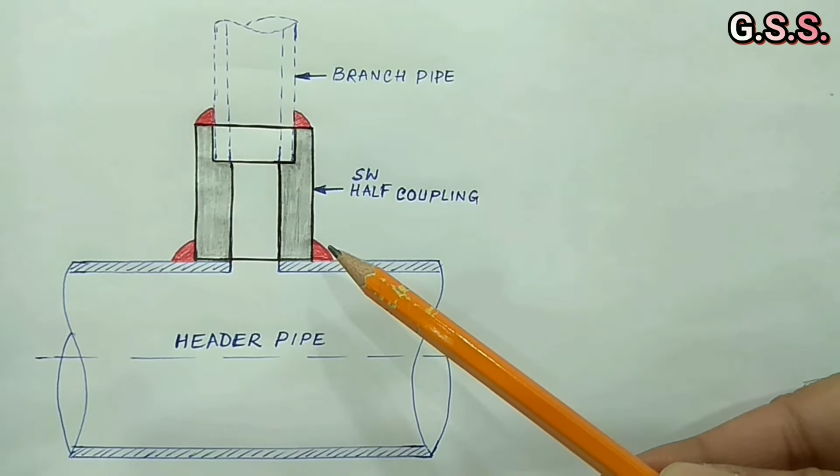Half coupling is used for taking small dia branching from large dia header pipe, and half coupling is directly fillet welded to the header pipe. Half coupling can be of socket weld end type or can be of screwed end type, and half coupling dimensions are as per ASME B16.11 3000 pound, 6000 pound or 9000 pound.

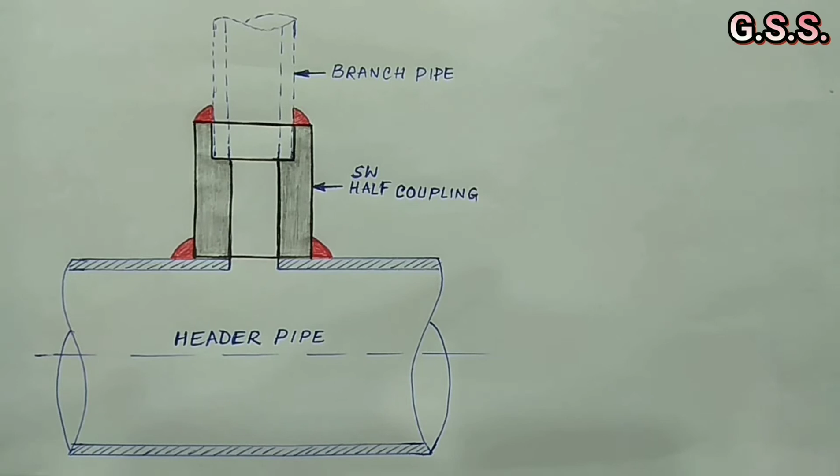Half coupling is of robust construction and can be used for high pressure and high temperature service, but radiography is not possible for socket weld joint. Where radiography requirement is there or where cyclic operation is there, it is better to use weldolet instead of half coupling. Half couplings are recommended to use up to 50 bar pressure. Beyond 50 bar, it is better to use weldolet.

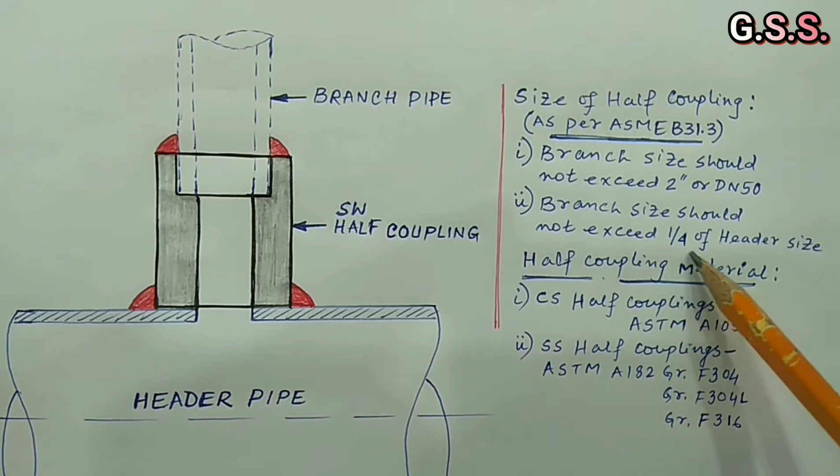Regarding size of half coupling, two considerations are there as per ASME B31.3. Number one is branch size should not exceed 2 inch, that means 50 millimeter NB, and number two is branch size should not exceed 1/4 of header size. That means for 4-inch run pipe we should use half coupling up to 1 inch size. If we want 1.5 inch branch on 4-inch header, we should use 4 inch by 1.5 inch reducing tee.

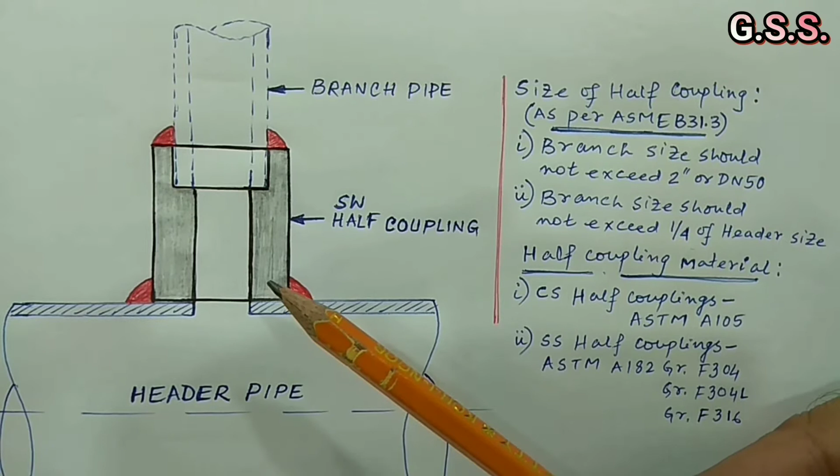Regarding welding of half coupling, normally hole is made on header pipe first and then half coupling is placed on header pipe and then fillet welding is done. It will be better if we grind bottom outside of half coupling to V shape and make full penetration welding. In this case, strength of half coupling will be double compared to strength of fillet welding.

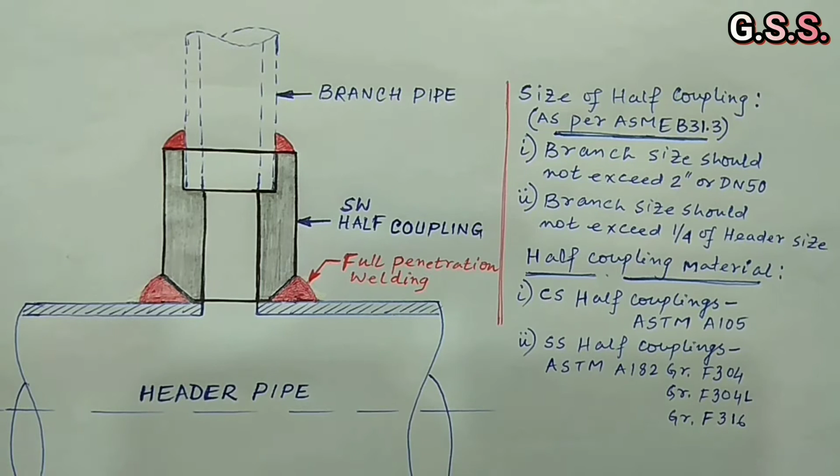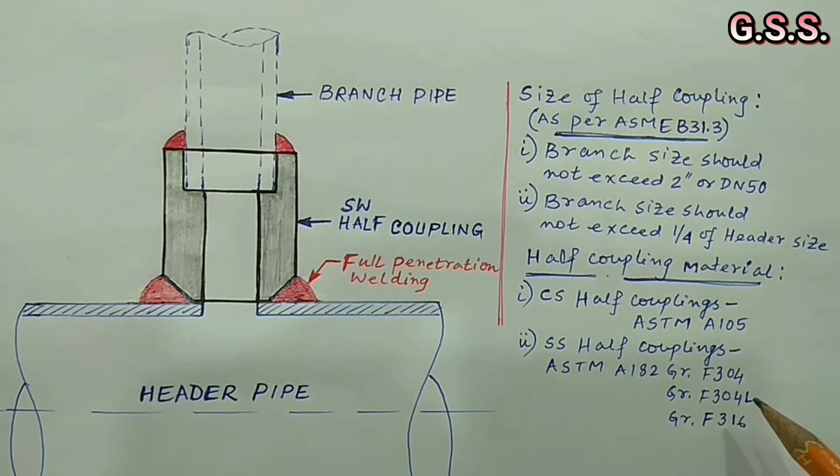Commonly used half coupling material is forging material as per ASTM A105 for carbon steel half couplings and ASTM A182 grade F304 or F304L or F316 for stainless steel half couplings.

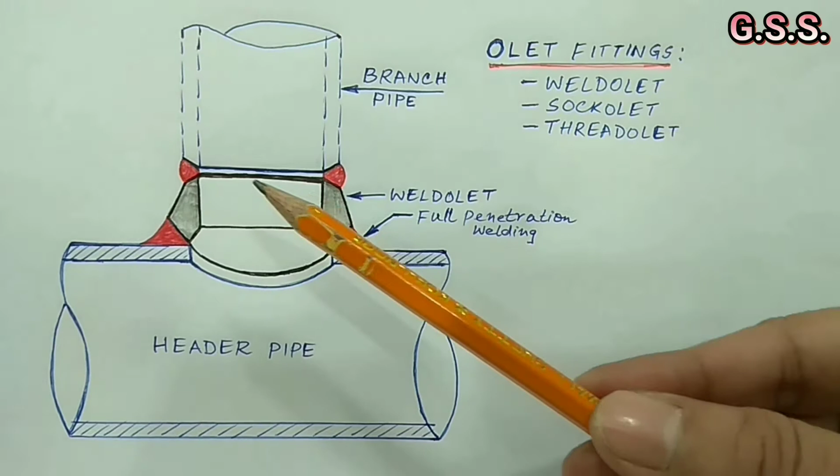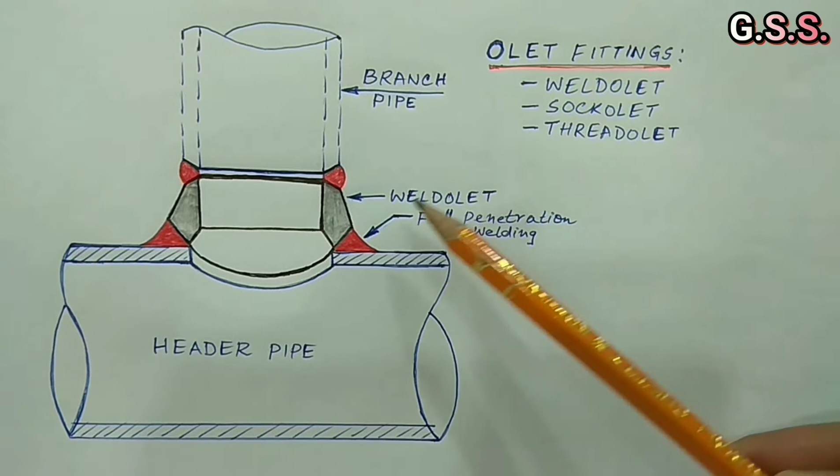Olet fittings are integrally reinforced branch outlet fittings and normally used up to branch size of 6 inch. Olets provide an outlet from larger header pipe to smaller branch pipe. Mainly three types of olet fittings are used: weldolet, sockolet and threadolet, and dimensions of olet fittings are covered in MSS SP 97. Weldolet has header side and branch side beveled end, whereas sockolet is having header side beveled end and branch side socket weld end, and threadolet is having header side beveled end and branch side female threaded end.

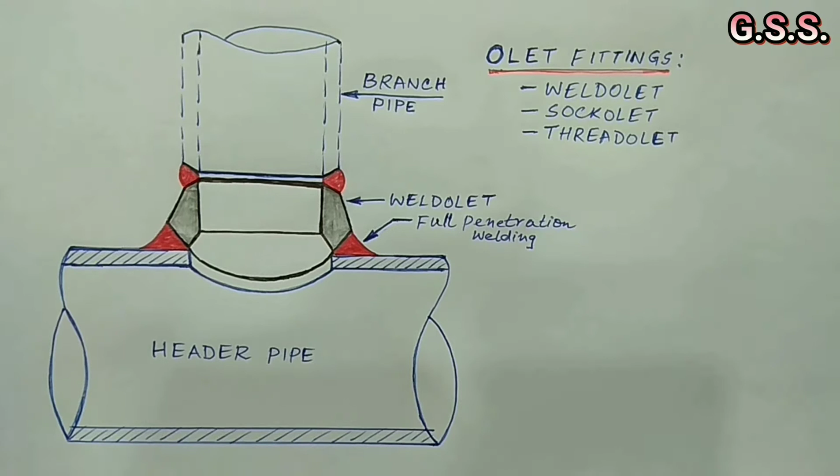Weldolet is having both beveled end, and weldolet is considered as butt welding fittings, and the shape is designed to minimize stress concentration. Weldolets are used for high pressure and high temperature service where radiography requirement is there, and for critical fluids where leakage is hazardous and where cyclic operation is there.

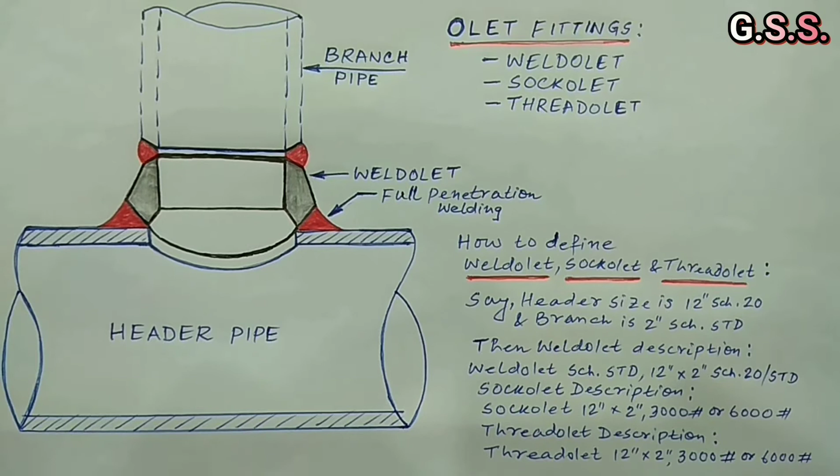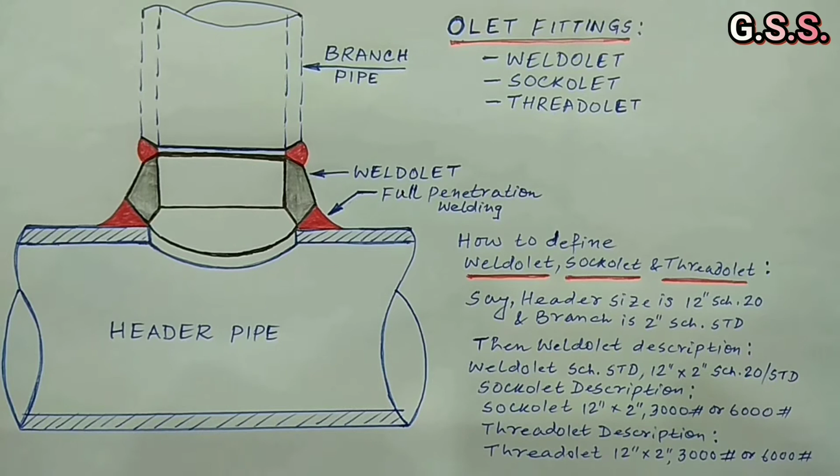Commonly used olet fittings material is forging material as per ASTM A105 for carbon steel olet fittings and ASTM A182 grade F304 or F304L or F316 for stainless steel olet fittings. Now, how to define olet fittings? That means weldolet, sockolet and threadolet.

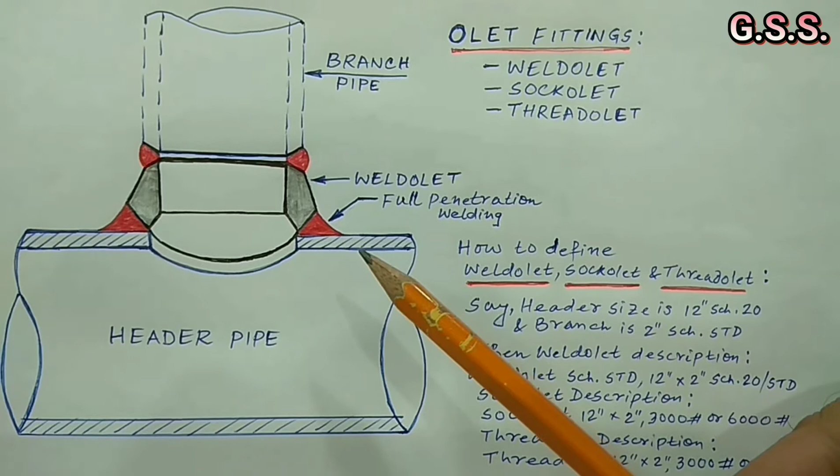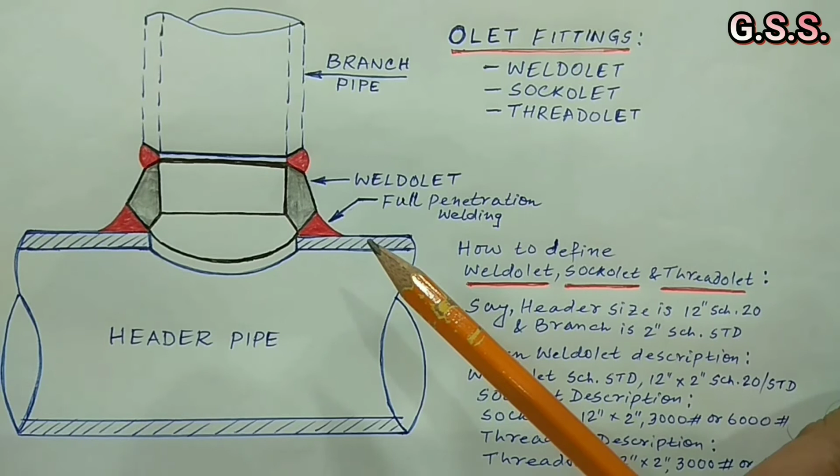Olet fittings reinforcing characteristic is a function of the run pipe wall thickness, because material removed from run pipe is compensated by integral reinforcement of olet. Hence, the basic schedule or pressure rating level of the olet fittings are determined by the wall thickness of the run pipe. When the wall thickness of the run pipe and the branch pipe are different, the wall thickness of both run pipe and the branch pipe should be specified.

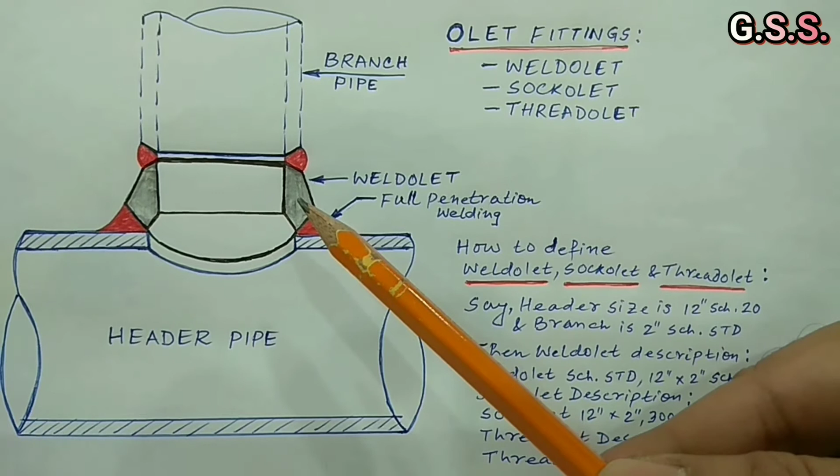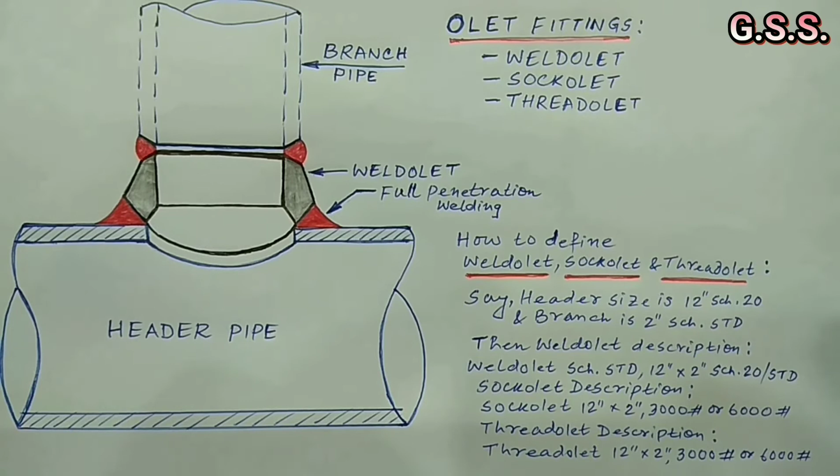But the run pipe wall thickness is used to determine outlet pressure rating level, and the wall thickness of outlet or branch end should match with the wall thickness of the branch pipe. In MSS SP 97, basic rating or schedule of weldolets are defined as Schedule Standard, Schedule XS and Schedule 160, whereas sockolets and threadolets are defined as 3000 pound and 6000 pound depending on design pressure.

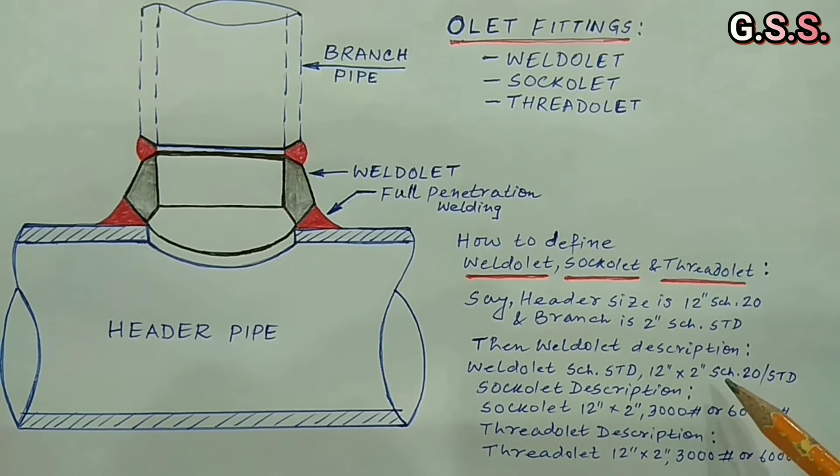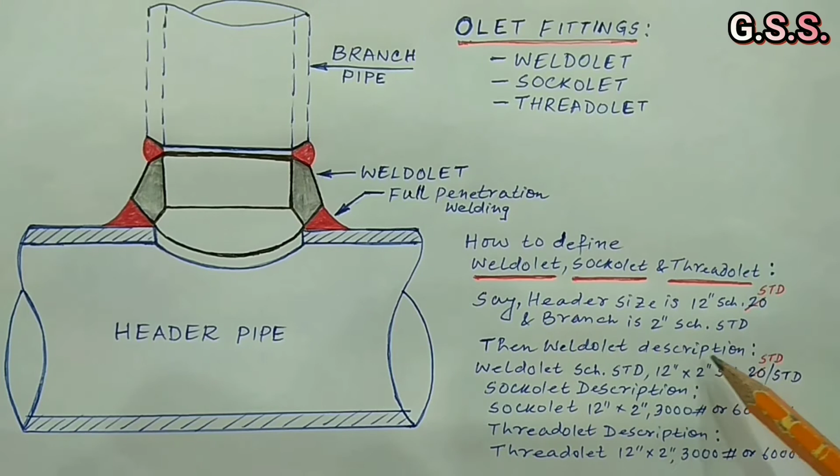Let us take an example. Say header pipe size is 12 inch schedule 20 and branch pipe size is 2 inch schedule standard. So the description of the weldolet shall be weldolet schedule standard 12 inch by 2 inch schedule 20 by schedule standard. If header pipe is 12 inch schedule standard and branch pipe is 2 inch schedule standard, then description of weldolet shall be weldolet schedule standard 12 inch by 2 inch schedule standard by schedule standard.

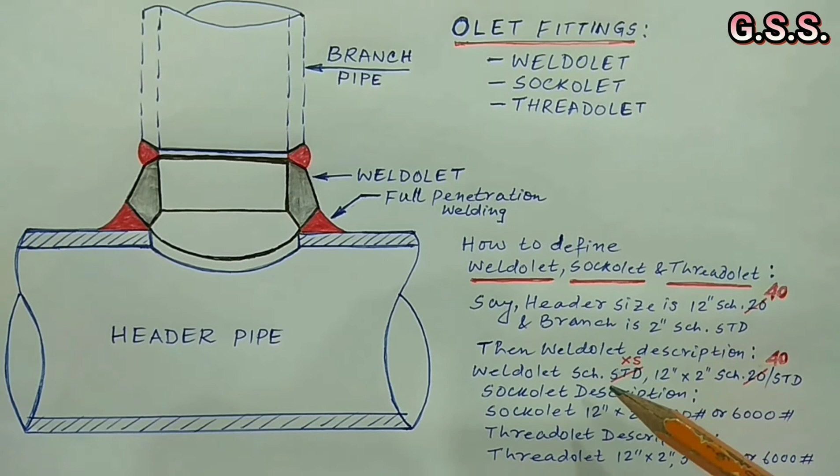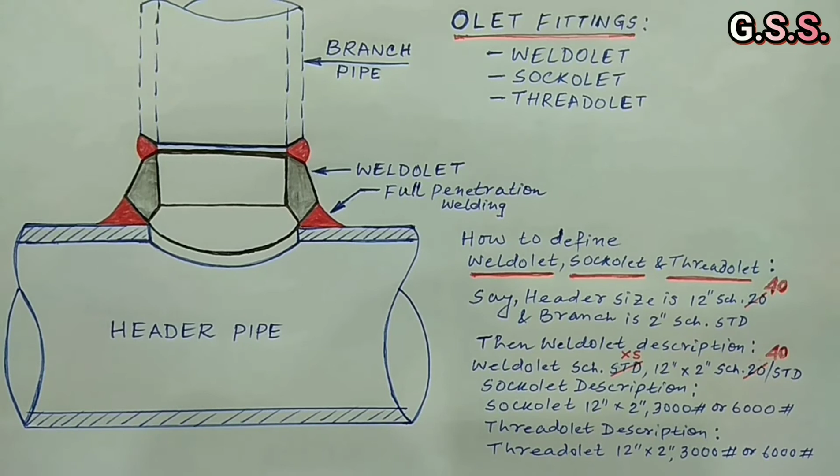If header pipe is 12 inch schedule 40 and branch pipe is 2 inch schedule standard, then description of weldolet shall be weldolet schedule XS 12 inch by 2 inch schedule 40 by schedule standard. Because in MSS SP 97 weldolet ratings are schedule standard, schedule XS and schedule 160, and for 12 inch, schedule standard is thicker than 12 inch schedule 20 and 12 inch schedule XS is thicker than 12 inch schedule 40.

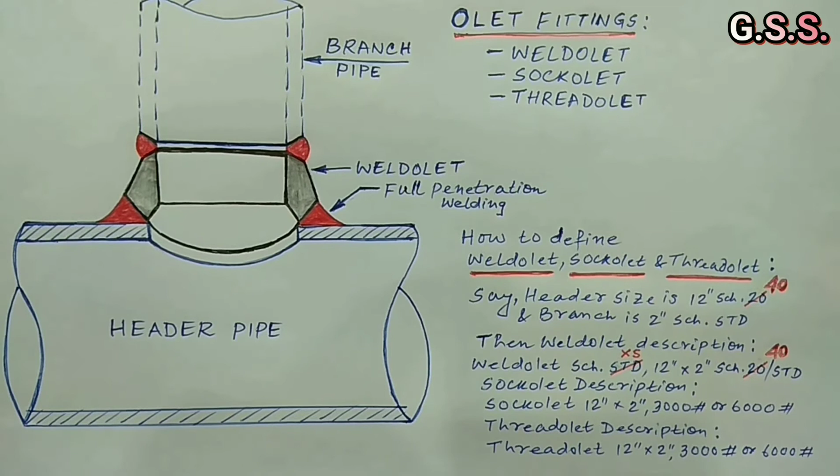For same 12 inch by 2 inch branching, description of sockolet shall be sockolet 12 inch by 2 inch 3000 pound or 6000 pound depending on pressure, and description of threadolet shall be threadolet 12 inch by 2 inch 3000 pound or 6000 pound depending on pressure.

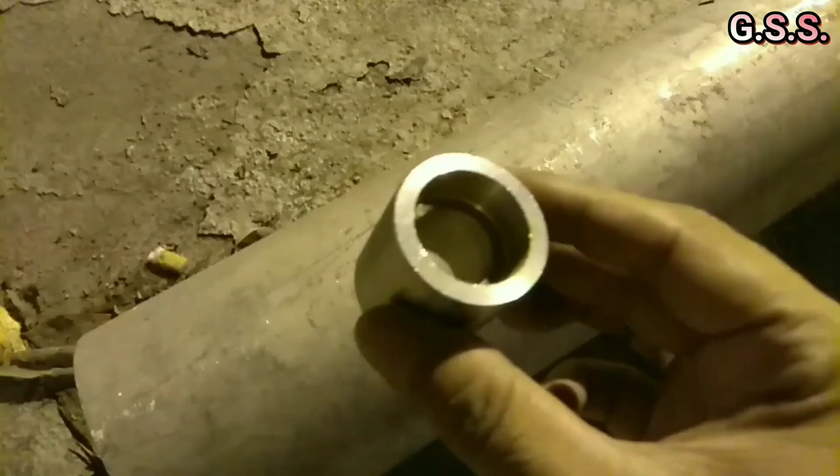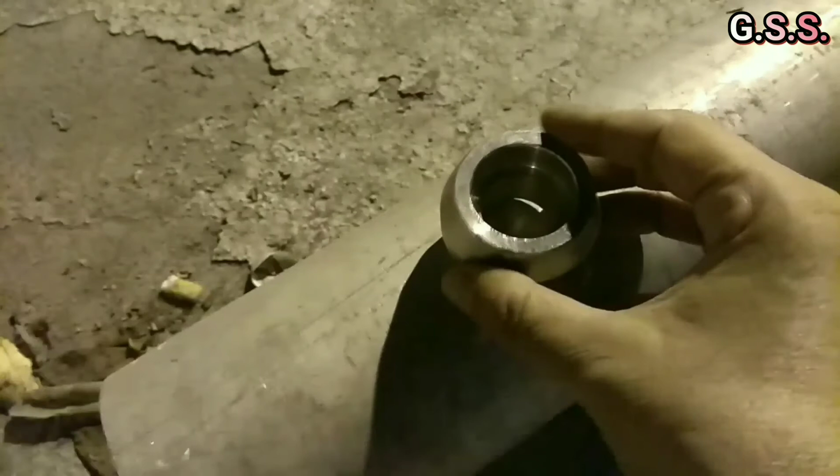This is one socket weld end half coupling. Bottom side is plain and fillet welding is done between bottom of half coupling with header pipe. Top side of half coupling is having socket weld end and branch pipe is fillet welded. This is one sockolet. Bottom side is having beveled end and bottom side profile matches with header pipe outer profile, and full penetration welding is done with header pipe. Branch side is having socket weld end and branch pipe is fillet welded.

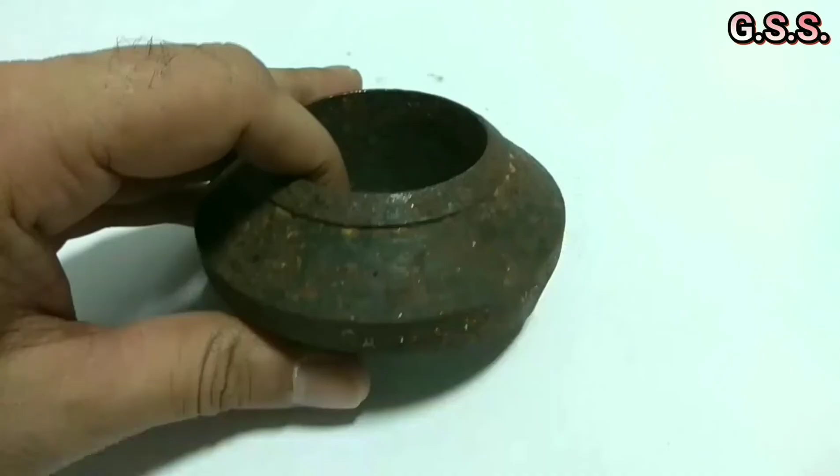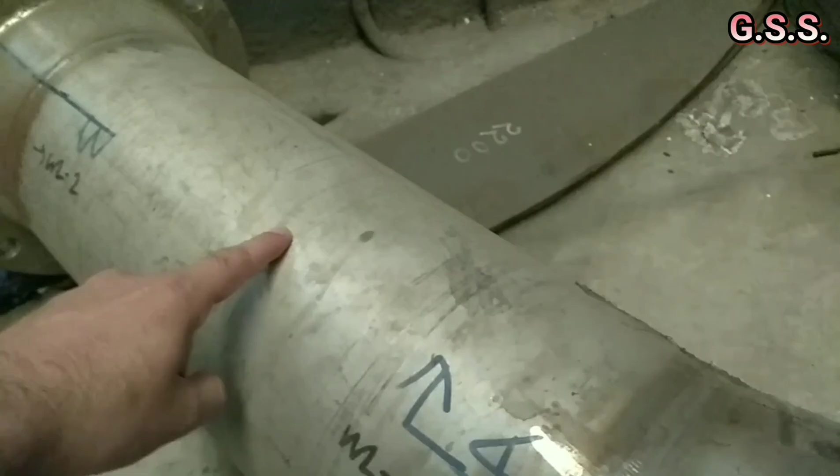This is one 8 inch by 2 inch weldolet having both side beveled end and bottom portion is having profile matching with OD of 8 inch pipe. To install this weldolet, first opening is done on 8 inch header pipe, then weldolet is placed on header pipe and full penetration welding is done between header pipe top and weldolet bottom. Then branch pipe is butt welded with top beveled end of weldolet.